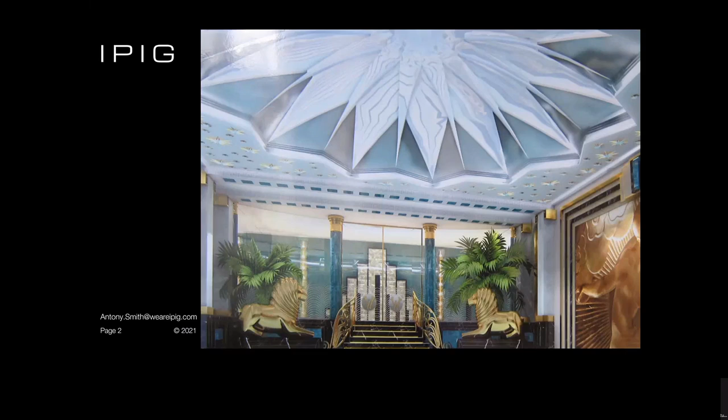And he said, you know, this is a glass ceiling, or this is a decorative ceiling that they have in one of the rooms in this house. And could we realize it? Could we come up with some ideas as to how to make it? It was just an image. We were also pointed towards the Daily Express building in Fleet Street as an example, and you'll see some of the design cues from this building, Art Deco style of interior, and the coffered ceilings, the textured plasterwork.

So you'll see some of these cues repeating through and being incorporated into this particular project. We were also pointed by the interior designer towards the Palm Court Lounge at the Burgh Island Hotel in South Devon. Again, another example, and this started our design.

It started us thinking about how could we construct the ceilings for this project, incorporating glass, incorporating some form of backlight. It's worth noting that these ceilings, or this particular project, is underground. It's located in a basement, so there is very little natural light.

The box, the construction that it is in, is a large subterranean concrete volume, and we had to put this glass ceiling together with switchable, adjustable, controllable backlight, and with this great kind of image that they wanted to create this grand interior space.

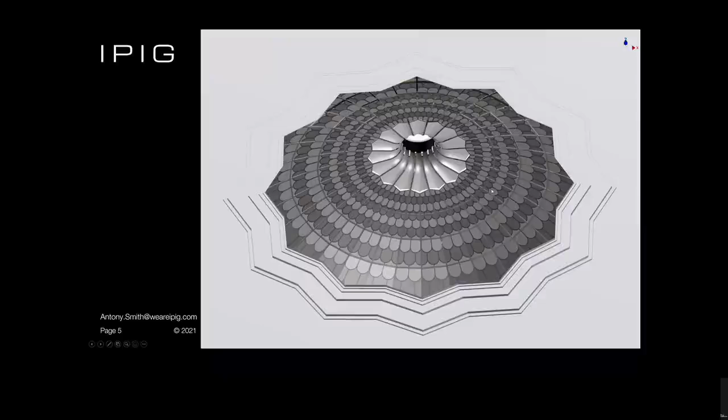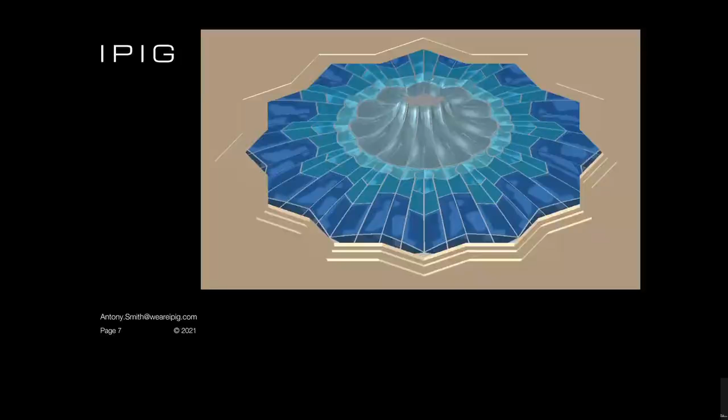And we worked with a local supplier to start to create some glass samples to see how these might work, to see how they might be backlit. The very simple mixtures of different depths of sandblasting, different types of surface texture for the glass. We took some of the cues on colour from the projects that we'd been pointed towards, and we started to look at different shades of blues and different shades of translucent blues, and to prototype or to sample some of the different Vanceva ranges and different combinations of interlayers.

At the time, the frame was intended to be a brass frame. That changed during the course of the project. So we looked at backlighting, we looked at different effects that we could achieve with the blue glass. But it wasn't really being sold to the clients.

It's worth noting that there was an interior designer. There were no architects involved on this particular project. There was a structural engineer for the concrete box, but we were responsible for the design of the glass, the specification of the glass, the design of the framing, all of the suspension system. Basically everything that went inside this concrete box was down to us. And we had direct contact with the client and the client's representative.

And for the first few months, it was a little bit like playing pin the tail on the donkey. We're trying to second guess exactly the direction that this project was going to take. We were given a mood board by the interior designer, and it was something that was incorporated into several of the other projects that they were working on with this particular client. And there was a lot of textured glass. There were some deep sandblasted glasses. There were some Lalique decorative screens.

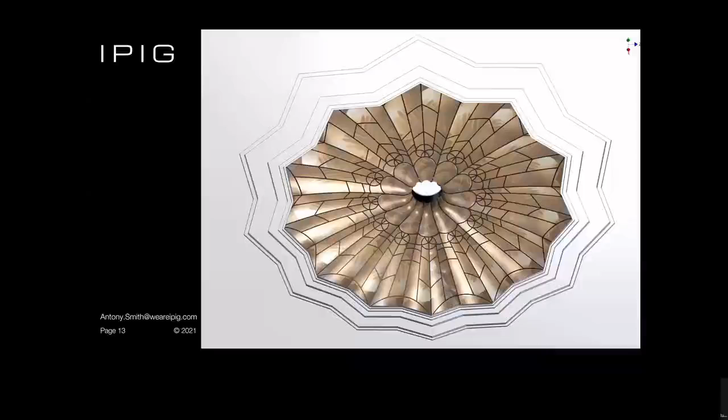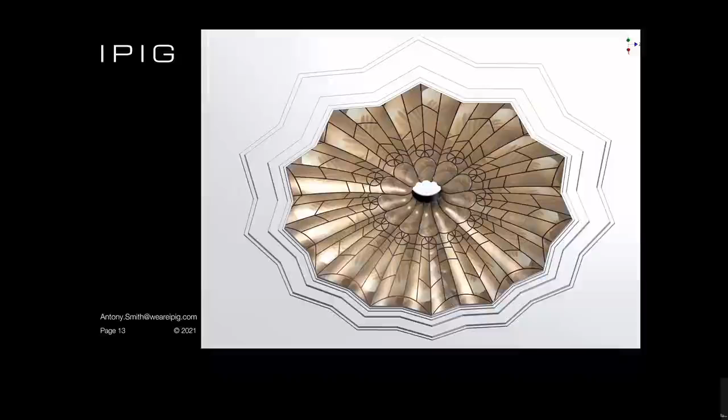The overall size, as I mentioned, is approximately 8.5 meters in diameter, and if we go back, sorry, you can see it's divided into 12 segments or 12 subdivisions with the central funnel in the middle. So we understood that we were going to have to make some kind of funnel section out of glass, and then we're going to have to make these petals.

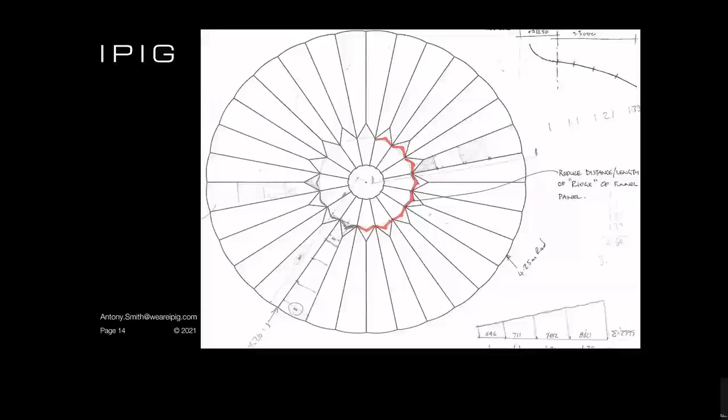And the petals, are they made out of one piece of glass? Are they made out of a number of individual pieces of glass? What's the solution? And if you cast your mind back to the Daily Express building as an inspiration to this project, the ceiling there is entirely made up of curved surfaces. So we wanted to get a curved profile into the glass, but we weren't really sure how this curved profile was going to work.

You can see here some of the early stage sketches as to the approximate proportions. It's maybe just over 4 meters from the center point out to the perimeter, subdivided into 12 or 24 pieces. You get an arc length of around about 1 meter at the perimeter. And we wanted to get some texture, as I mentioned. So we were looking at a valley and a ridge and different types and orientations of glass.

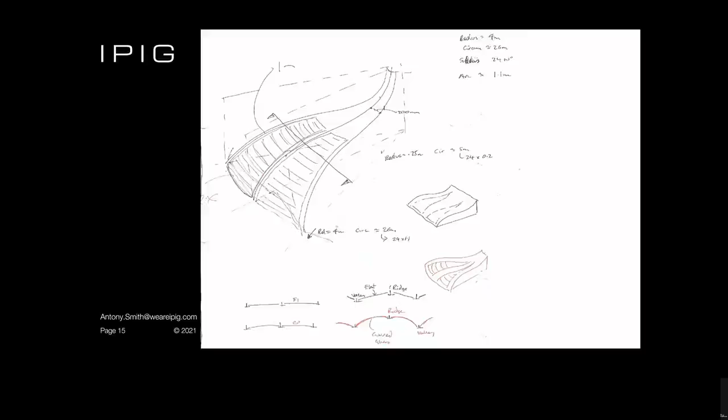And we took that as a way of introducing some curved glass, but in something that was vaguely economical. Put very simply, every single piece of glass on the petals of this ceiling is curved to an 8-meter radius. So this sketch indicates that you take some spherical surface, and you take another piece of the spherical surface and you pull them together to form a ridge. That's essentially what we did with the design and development of this particular surface.

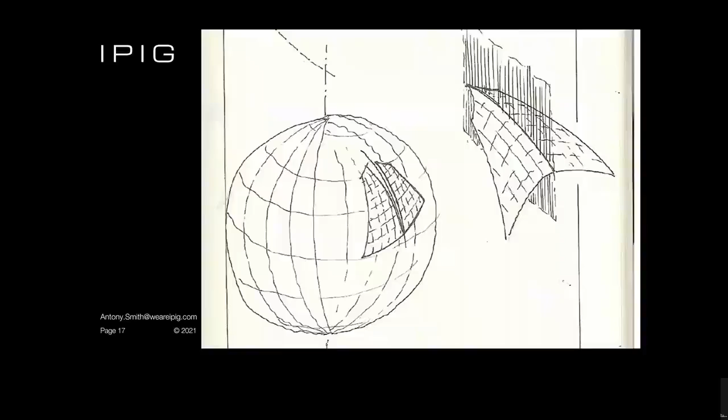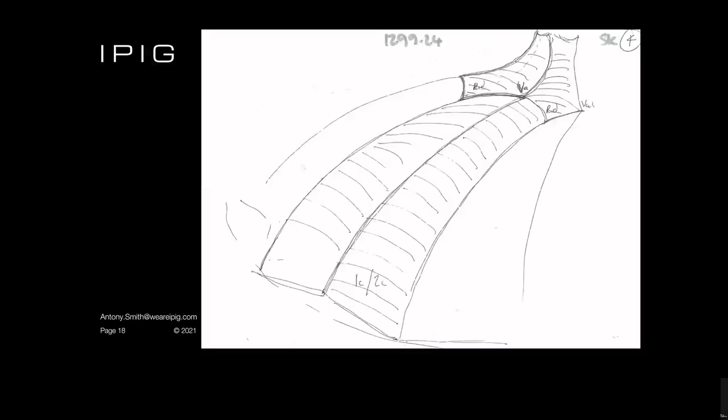So we have the funnel sections in the middle. We've got 12 left-hand petals. We've got 12 right-hand petals. And the funnel section in the center started out as a toroidal surface, running from the oculus in the center out to the interface where the funnel then joins the petals. Because of the shape of the concrete, we ended up having to adjust that geometry and flatten it out.

And we ended up with a surface which is anticlastic. It's curved in one direction, effectively in the x-axis. It's curved in the opposite direction in the y-axis, and it actually introduces a fold down the middle of the glass, where what starts out at the top of the glass as a smooth curve ends up joining the left-hand and the right-hand petal here. There is a slight ridge line, which I'll show you shortly.

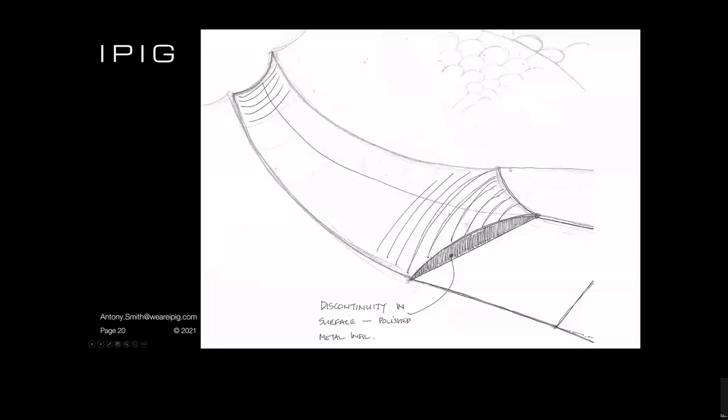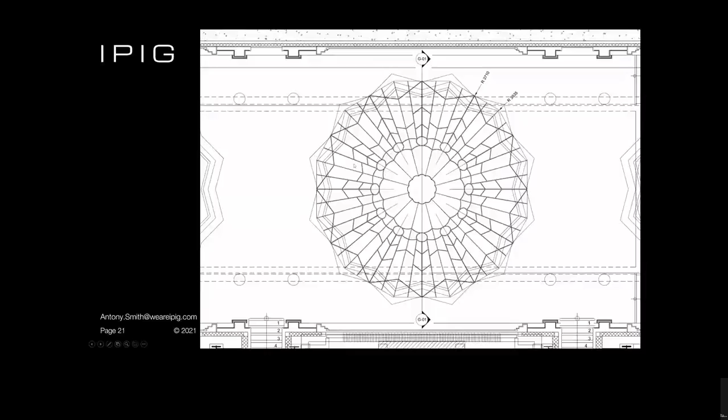The subdivision of the glass was worked out in a fairly traditional Art Deco style pattern, and this was the final plan of one of these glass ceilings. There are actually 5 of them in a line, so there is a fairly large degree of repetition, but this is the plan of one circular glass ceiling with the oculus in the middle, the 12 funnel pieces, and then the 12 radiating sections behind.

Unfortunately, it didn't allow enough in, and so between the glass skylight, which still exists, and the glass funnel, which we installed, there is a glass diffuser panel, and then there's an array of 120 LED lights which simulate natural daylight and provide an incredible blast of light into the basement space.

There's then a series of radial suspension frames which are bolted into the underside of the concrete, and then the entire underside of the concrete is sprayed with an acoustic and fire-resisting sort of surface finish, which looks a bit like it's just a kind of fluff, if anything, but it acts to diffuse the uplights, which we also had to incorporate into the framing of these skylights.

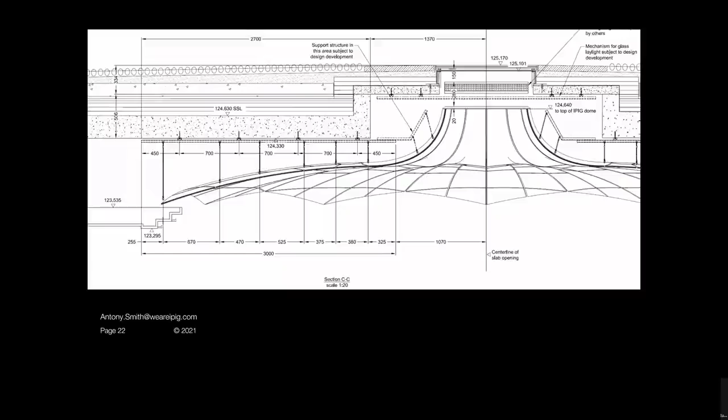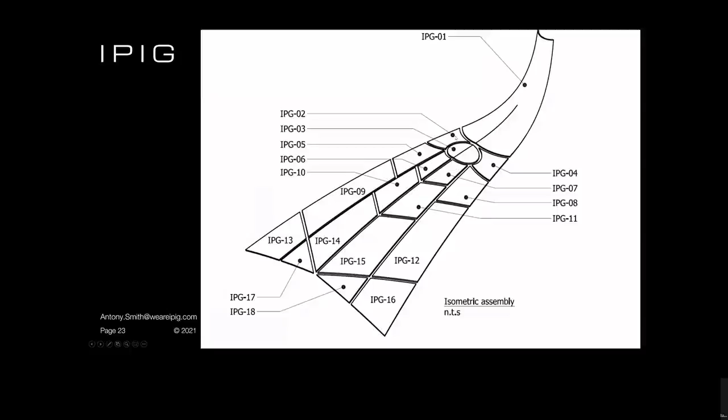So a total of 1,145 pieces of glass, all shaped, all curved, all laminated, and all with the glue chip and the surface feature. And then the framing, a series of bespoke frames, which I'll talk through as well in a moment.

So there are 12 of these ribs. They're all shaped, and the profile here allows the welds to be inserted in each of these recesses, and therefore it gives the glass a nice bearing surface to sit on that isn't obstructed by any of the welding.

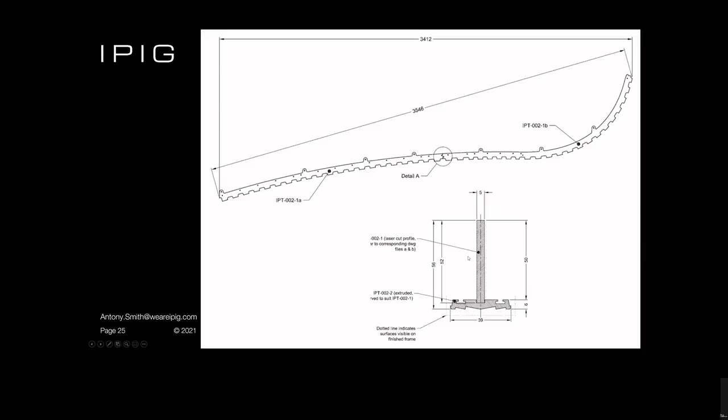To construct the doubly curved frames, we worked with a joinery company out in Oxford, and they created these CNC timber jigs for us. And as I said earlier, I'm going to acknowledge a whole load of people towards the end of this, and the part that they've played in helping to realise the different stages of the job and the different materials that we've selected for incorporating into this.

What the joiners did for us is they made these frames. We wanted to be able to locate all of the individual strips of aluminium and accurately weld them. They came up with the idea of these removable dowels, so that you can put all of the bits of metal in, you can tack them together, and then once everything's tacked together, obviously given its geometry, you can't lift it out of a mold, but you just remove all of the dowels and lift it off the jig.

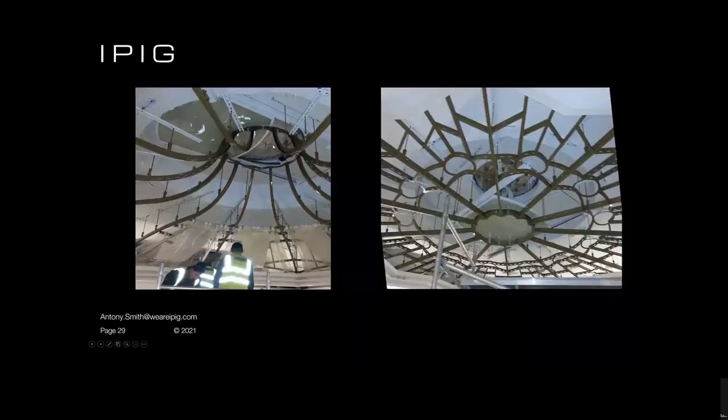One of the domes, I said there are 5 of these ceilings. One of them is actually flat, so you've got a slightly different profile of frame on this ceiling. The remainder are all doubly curved. So back to the glass. There was a strong desire to use a golden coloured glass.

These are examples of the glue chipping effect here in the background, and this is the glue chipping when it was applied to the gold reflective glass. And there was a strong desire for it to be backlit as well. So here we have some prototypes that we did with the glass when it's face lit on the left and when it's backlit on the right.

Now, some of you might be looking at that and thinking it's not particularly impressive when it's backlit, and we'll get onto that again a bit more in a short while. It's a very, very fine balance between something that looks golden and reflective and something that looks orange and plastic, and that was one of the major challenges towards the completion of the job, was to get the light balance right.

So a word about the glass. The glass was Pilkington Eclipse Gold, which is a pyrolytic coating from Ohio. Pyrolytic coated glass manufactured in Ohio. Used to be used a lot in the last few years of last century, not been used an awful amount since then. But we ordered a number of end caps of glass from the States and had them shipped over to Europe.

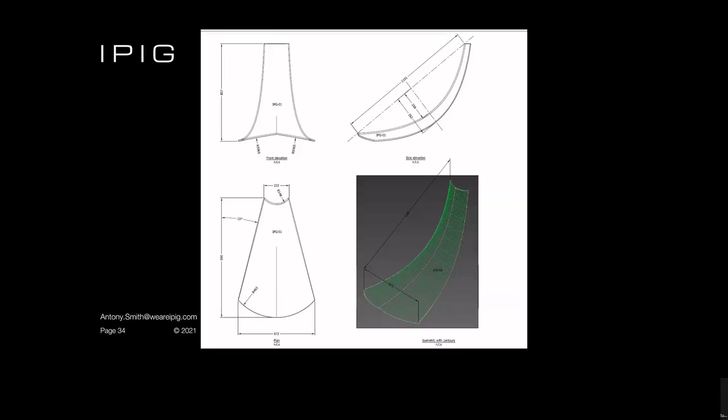Now, this isn't a secret, we worked with Sunglass on this, and I must say that Jerry, who many of you will know, and Mr. Lincetto in their production were both absolutely fantastic. Initially, when we approached them, they said they couldn't do it, but we persevered, we convinced them, and they ended up through a series of trials and prototypes. The first few panels weren't all that attractive, but there were more attempts. Slowly got smoother and smoother, and then they started curving some of the gold glass that we had sent over.

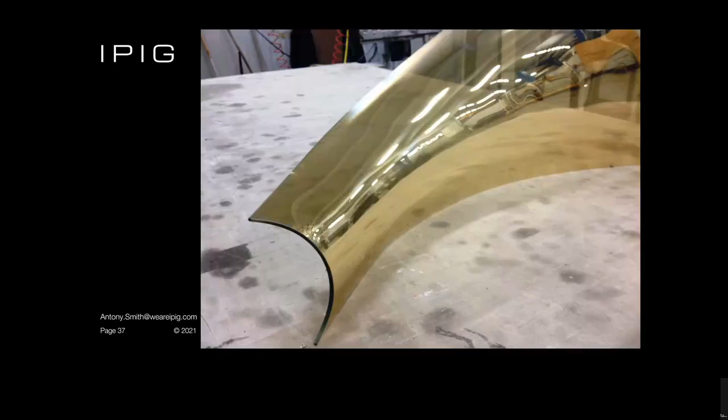Now what you can see there, if you look very closely, is that the coating actually cracks a little bit, but given what we were going to do with the glass, that didn't matter. So a lot of the normal specification requirements with regards to optical clarity and view through the glass, and not damaging the coating of the glass, all of the normal things that would be specified by a facade consultant were not appropriate, because it was to be totally internal, it was to be laminated with the translucent interlayer, and it was to be backlit. It didn't provide any amenity, it didn't provide any view, it was purely a decorative surface.

And the end result was really, really fantastic. We couldn't have asked for any better product from Sunglass on this. The final specification was 6mm annealed with the cracked ice texture on surface 1. We then had 5 separate interlayers, giving us the translucent and giving a little bit of extra colour. And then we had the low iron glass contra panel laminated to the back.

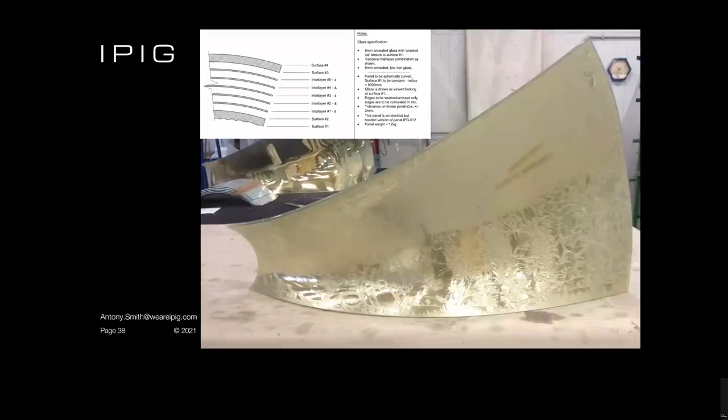Going back to the framing, we sent one of the modules of framing over to the factory in Italy, and every single panel that was processed was trial fitted into its appropriate final location in the framing, so that we knew that it was going to fit. It's pretty straightforward, but given the curvature, given the number of panels, it was a process that we asked for. The most important was obviously panel IPG1, which is the one right in the foreground, but this is the size and shape of all of the other glasses.

Sunglass helped us out tremendously in that we knew what it was we wanted as an end product. If we go back up through the process a little way, the glasses came over into Europe. As I said earlier, they were cut, they were chipped, they were then CNC cut in one factory. The factory that did the CNC cutting to a profile which was provided to us by Sunglass also CNC cut the contra glasses, and they cut them to very slightly different dimensions so that the glass panels would fit into the frame, wouldn't foul in either insertion or subsequent removal.

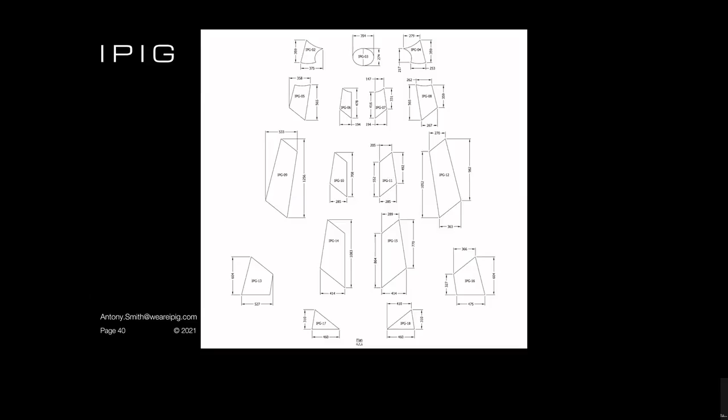And then 1140 curved laminated gold textured glass panels were painstakingly made and laminated and checked and shipped to us in London.

There's a guy, Tony Smith, no relation to me, who worked for NSG Pilkingtons in the States. He handled all of the procurement and all of the shipping and bringing the glass over into this country. The glass was processed by Sas van Gent when they were still in business. And so Frank Lefebvre and Francis Cerise and Klaus Langot and Darren Kearns, a number of people who were involved in XXL, which is part of Saint-Gobain glass. They were hugely inspirational and hugely helpful.

The glass was passed through Myvert Glass in Belgium. Tough Glaze in the UK did all of the lamination of the flat panels for us, and CG Joinery made the jigs for us. And then, as I mentioned earlier, Jerry, Mr. Lincetto, Michaela, the team at Sunglass were extremely influential in enabling us to get the glass made over in Italy.

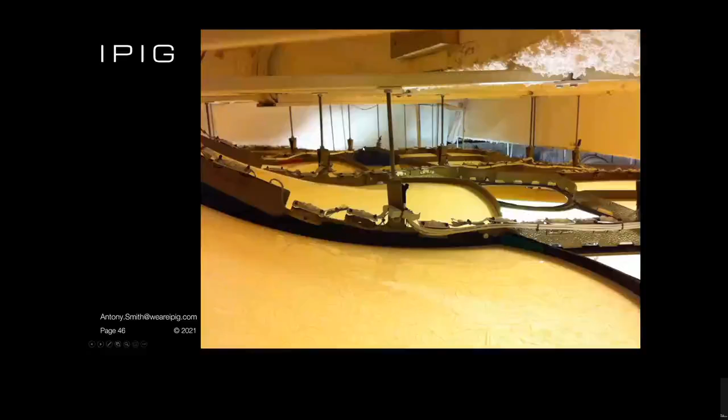You see here a number of the funnel panels starting to be installed, and here they look gold. They look gold and they look reflective. This on the perimeter is exactly the same glass, but here it looks orange and it looks plastic. Here you see the lighting array, the diffuser panels. And then this is the view up above the glass once we'd started to install quite a lot of it. You see the suspension frame, you see the LED lighting chains, all the finish on the concrete which diffuses the uplights.

And here you see the very final piece of glass being installed. It's quite a simple process. Just feed the glass up through its own void and then lower it back down. There's a gasket race around the inside on the back side of these, and the glass panels just rest with gravity. There's no wind uplift. There's no weatherproof requirements. They're purely decorative.

And this is the way in which the ceilings were seen when the installation was completed. Now, it's very fair to say this wasn't exactly what was expected. It doesn't look as spectacular as we hoped it was going to. We'd trialed and prototyped the glasses. We trialed and prototyped the paint finishes. There's obviously a lighting array up above the diffuser panel, but as I mentioned earlier, there is this battle with regards to the lighting to get the lighting balance correct, to achieve a gold reflective dome as opposed to an orange plastic dome.